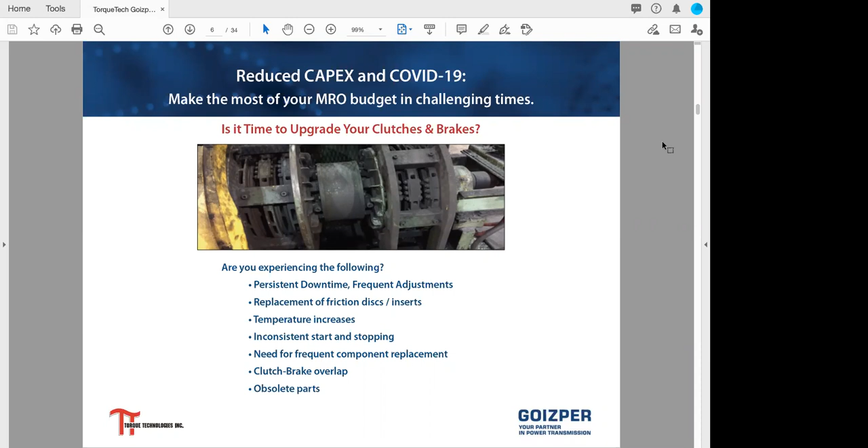Sure, Tom, and if I might add, one of the folks who responded in the survey said that they are having customers who've greatly reduced their CAPEX budgets because of lost business or paused business. But the response regarding MRO is, as one customer indicated, if it has to be fixed, we will fix it. So along those lines, is it time to upgrade your clutches and brakes?

Jeff, that's interesting because we are right in the process right now of reviewing the potential to do a conversion on a 1,250-ton press, and that will be strictly through a maintenance budget because the customer has stopped all CAPEX spending. So yes, and as far as is it time to upgrade your press, I want to just take a look at the picture.

And if you see that clutch and brake, I see nothing but headaches and problems. You have a separate clutch brake, so there's a potential for overlap. You have old components. What are you going to do if you can't buy spare parts? Also you see a lot of inertia, a lot of heat buildup, and you'll experience a lot of the items that we have listed on the slide.

But basically, you can take that clutch, and I am quite sure you can buy a new clutch brake for about the same price, maybe even a reduced price, as it would take to buy a full set of components to put that clutch brake back in service. Thank you.

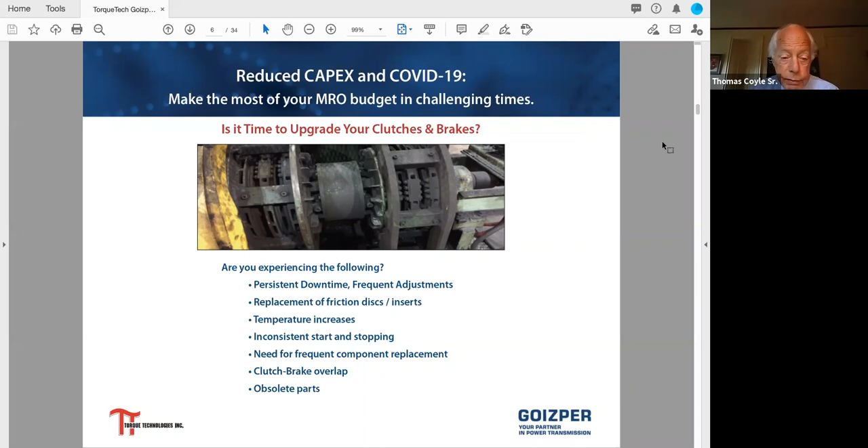Ralph, what do you think about that? Well, I appreciate it, Tom, and my thanks to Torque Technologies for allowing me to participate in the webinar. I want to preface all this by saying that the things I say, especially when it comes to the current status, this is my assessment of what I've seen in the hundreds of plants that I've been in over the last 35 years.

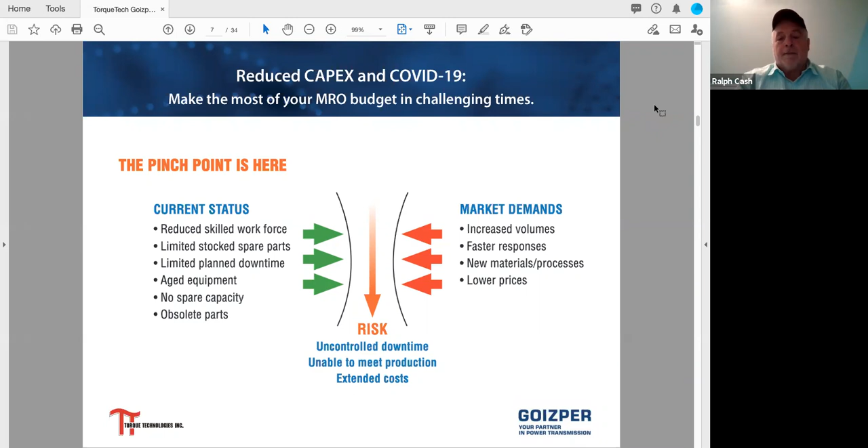Yeah, I just wanted to turn this over to Brad Binks, who has just received a very interesting question regarding automation. Brad, can you jump in on this? Well, yes, of course.

Ralph here has been speaking to the point of skilled trades, and the reduction of skilled labor in the workforce. One of the questions that came through, which is really timely, is what's the impact of automation on all of this? I think we've seen very positive impact on production capacity with automation.

This has certainly helped fill the gap on a lot of skilled trade issues and unskilled labor issues for that matter. But when we're talking about skilled workforce, what we see at Torque Technologies when we visit customers, we still see very good people, very talented people. There's just fewer of them. They're handling not only the stamping presses, but all the automation, whether it be welding automation or the automation around the presses, feeds, whatever they have in their plant.

And when it gets down to some of the nuts and bolts that we deal with working with customers, what we don't see is the depth of knowledge that there used to be years ago, especially in the stamping industry. I think that's partially what Ralph was alluding to.

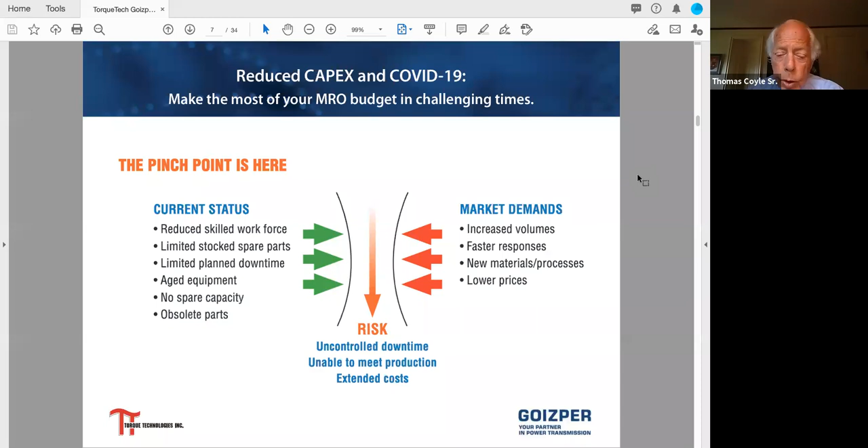Thanks, Brad. It brings up another point which Ralph mentioned, about people in the workplace. In fact, the last couple jobs we've looked at, customers come to us to be the total solution. We're doing not only supplying a clutch brake, we're doing the engineering, the transportation, the manufacturing of bracketing, any machining, and taking charge of the whole project. So we're seeing that again as a reduction of workforce.

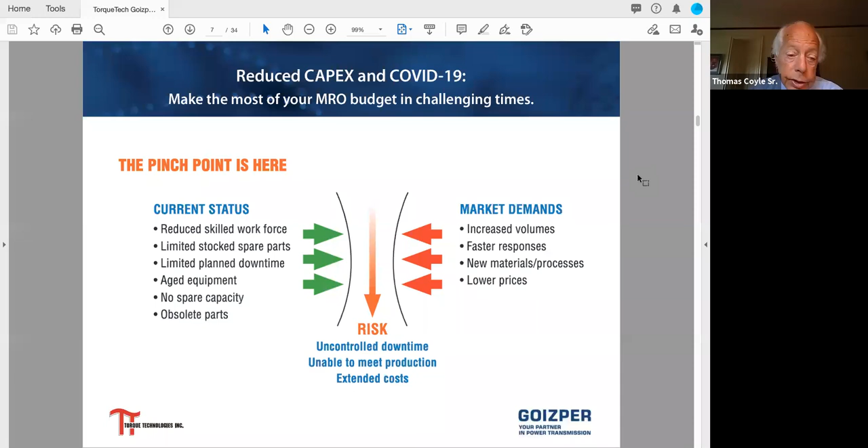And I'd like to go to the next slide if we could, and talk a little bit about and ask Ralph to jump in, because he's done a lot of this. Ralph's had a lot of experience doing press inspections when he worked for press manufacturers and major stamping manufacturers. Obviously, if we can get customers to allow press inspections, from there we can do the preventive maintenance program, set those up to match what we found with the press inspections to keep equipment running. Ralph, again, if you wouldn't mind joining me to just talk a little bit about the advantages of doing a press inspection and PM programs.

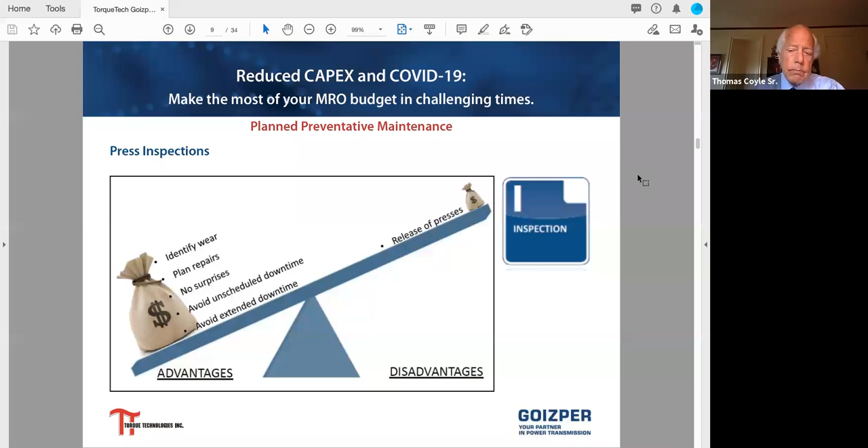Sure, Tom. On the inspections, I think it could be left unsaid, but I'll say it anyway. It's the key to understanding the condition of your equipment, to get an overall view of what shape your machine is in. By taking that information, you can develop an action plan for addressing the issues found during the inspection. But it's not just the inspection as a whole, it's understanding the information that you're gathering.

I think in the past, the thought should be to provide information as if the person reading it has never seen a press before, to make it as user-friendly as possible. Again, going back to my first comment, inspections are the key to understanding the condition of your equipment, because you can't fix what you don't understand, and you can't fix what you don't know.

And in this case, with our machines, ignorance is not bliss. It's not a human body, it's not going to heal itself. A mechanical press or hydraulic or whatever, it's only going to get worse. But you can't fix it if you don't understand it.

And then you got to understand the information that you're looking at, your brake travel. What does that brake travel mean, and how am I running the press? Do I have two months? Do I have one month? When I was with Clearing, we walked away from a press where the lead technician said, I'm going to put money down that that thing is going to fail within the next seven days. And they called the next day.

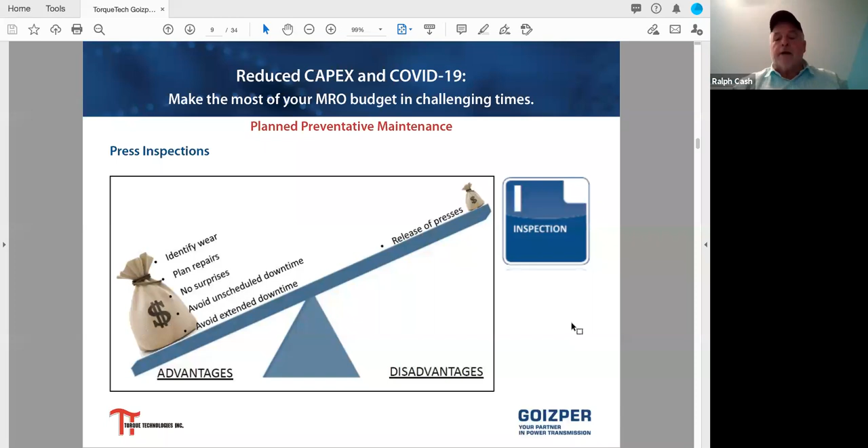Thank you. So, really, the result of all of this we're talking about is going to lean manufacturing, which can be a very successful operating measure with overall equipment effectiveness.

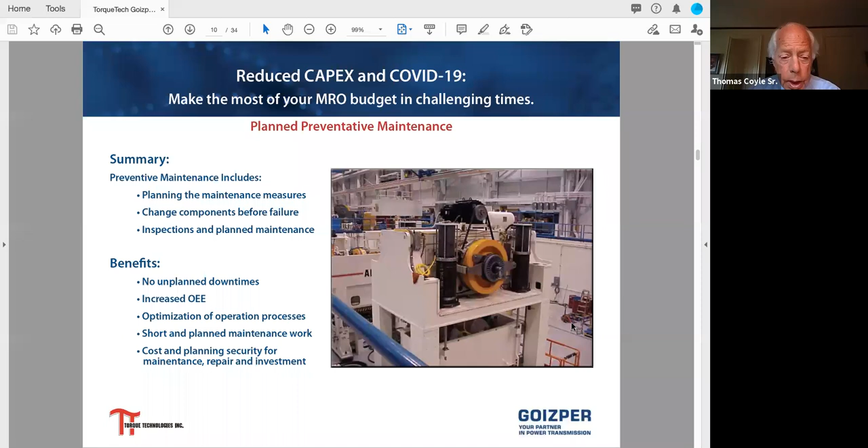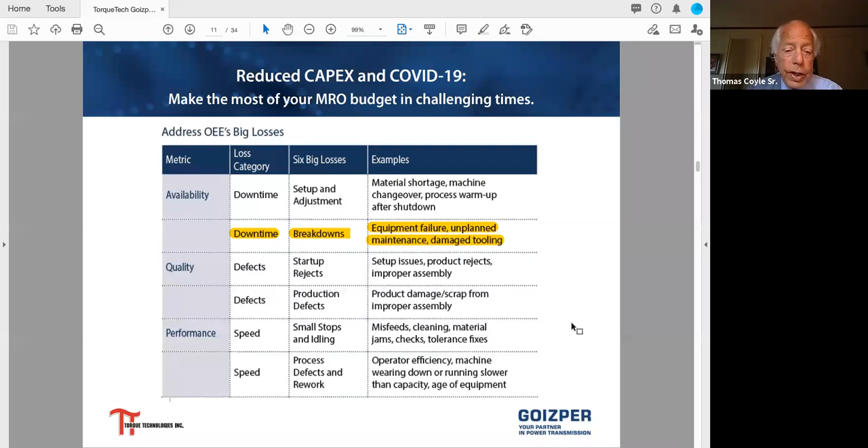The Harbor reports and other international measurements state that 85% is world-class and 60% is normal or typical for OEE. So if you're down at 60%, there's a lot of room for improvement that you can realize by increasing those numbers, doing things like upgrading equipment or doing clutch brake retrofits.

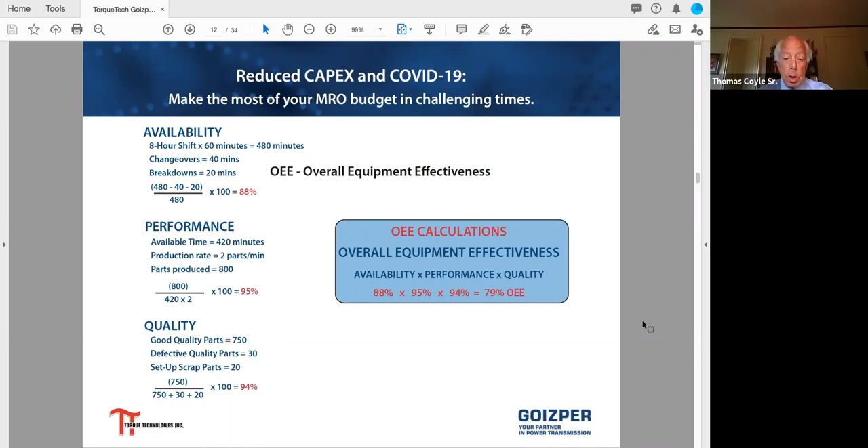Thank you. I'd like to now call on Ralph to get into some specifics of the retrofit process. Well, Tom, as you know, the anatomy of a retrofit begins with compiling the information that Torque Technologies would need to specify the right clutch and brake for the application.

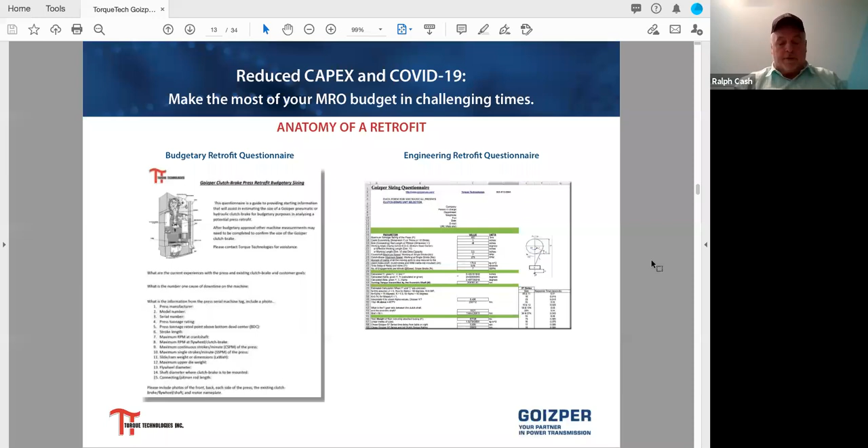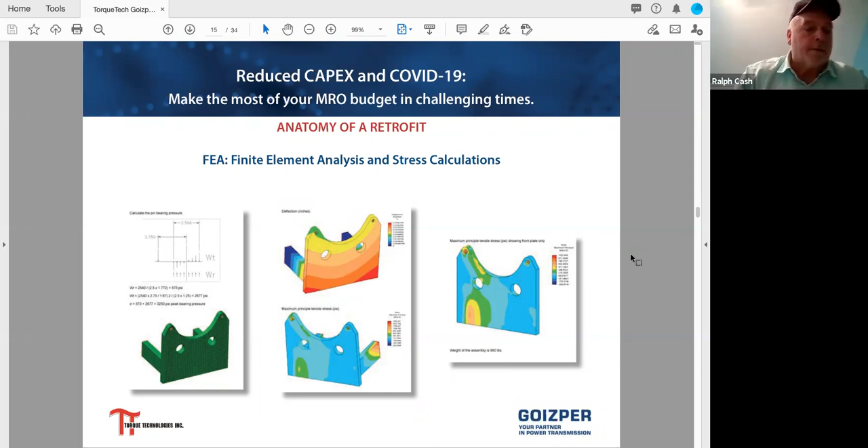It can handle the torque for the new clutch and brake, and it gives Torque Technologies the comfort of knowing they're providing a good product to their customer. Next slide.

While it's coming apart, you can get a tape measure, calipers on it, whatever you need, and then take those final dimensions to verify that what you were specifying is accurate. Remember, it's just a budgetary questionnaire to give you the cost and specification for the clutch and brake being recommended.

This last step is going to verify that what you're getting is actually the correct clutch and brake, and if you need any other parts like modifications to the brake bracket or whatnot. Then the last step is aftermarket support.

Something Torque Technology also provides is a quote for all perishable items. If you're able to get that quote from Torque Technologies on the perishable items for your clutch and brake, even if you're not able to order those right away, you can't inventory them, but keep that information close at your fingertips so you can order them when you need them.

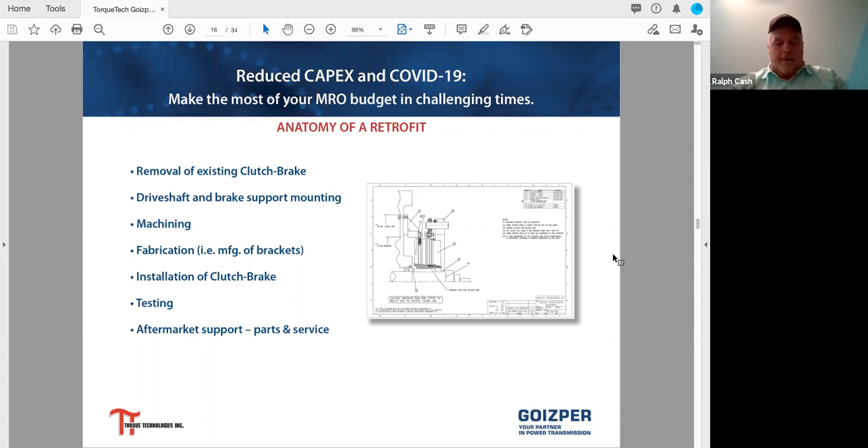Ralph, appreciate if we could go through some of the case studies, because you mentioned you've done multiple clutch and brake retrofits, and we're grateful that a lot of those have been with Goizper clutch brakes. If you could briefly go through some of the conversions as examples, would appreciate it.

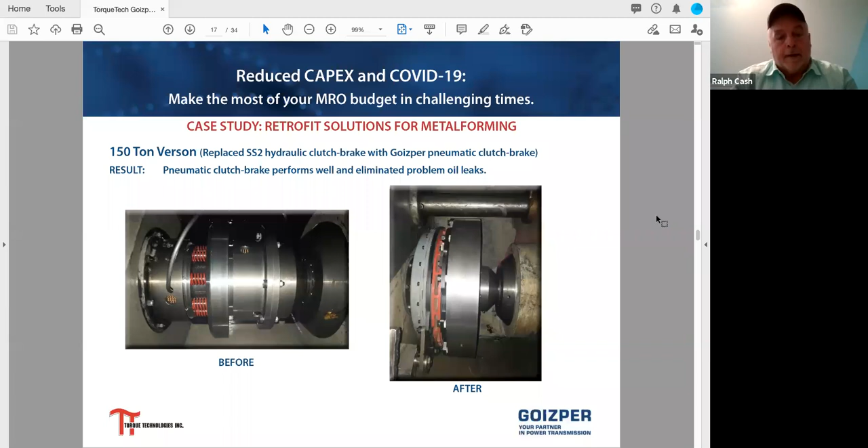Sure, Tom. The first case study is a 150-ton Verson. It had the original hydraulic clutch brake on it. The customer called company A and said, I'm losing oil by the barrels daily, and they're taking that oil and putting it back into the reservoir. He also said we don't really know what the company we bought this press from was doing as far as their application and stamping. So the question is, do I need a hydraulic unit? And if I don't, can I retrofit it with a pneumatic clutch and brake?

Company A went in and took all the necessary information - the hardness of the material, the upper die weight, the speed, the flywheel speed, the shaft speed, all the press specs - and put it into the engineering department. The answer to his first question was no, you're not generating the kind of heat that whatever the customer needed this for prior to purchasing the press, you don't need a hydraulic clutch and brake for what you're doing. So the answer to the second question is yes, you can retrofit this with a pneumatic clutch brake.

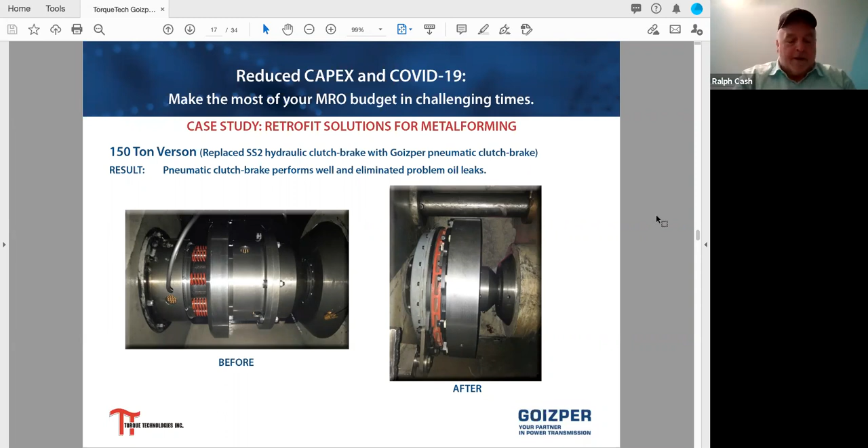At that time, as I said on one of the previous slides, this was when they took whatever measurements they needed that they couldn't get when the press was running before, especially on a hydraulic unit when that whole assembly was enclosed. So they were able to finalize all the additional dimensions.

The issues they found were the shaft was broken, so a new shaft was supplied. A new clutch support ring was manufactured and made. New spacers were made, the new brake pin supports were manufactured and installed. Then some of the pneumatic lines and lubrication lines called for some rearranging.

Let me say this, and I know I've probably said a lot so far, but from here on out, if you don't remember anything I've said, remember this: a retrofit does not have to be complex. Now on the surface, this looks like a very complex clutch and brake retrofit, but it doesn't have to be complex if you're working with the right people and you're working as a team.

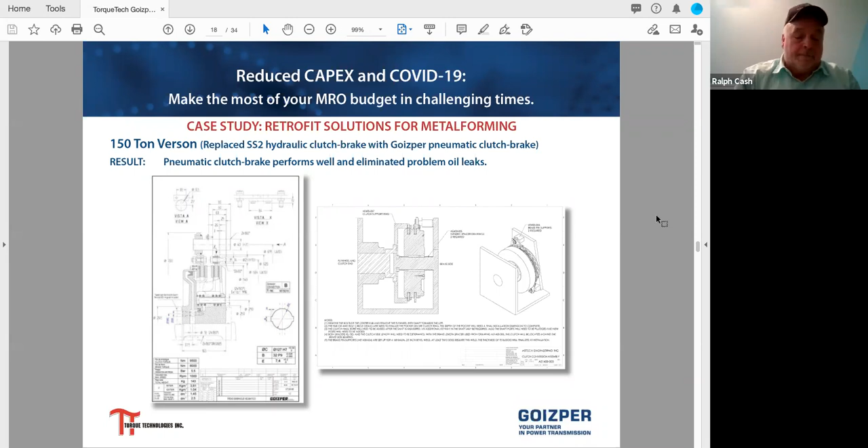Next slide, yes, we'll go into the next study. This was an automotive supplier that had a 400-ton clearing press, and they had the old Tornadyne pneumatic clutch brake on it. I think Tim Burns is on the panel - he would remember the Tornadyne clutch and brake. He's probably chuckling right now.

Company A went in, and it was intended to be just a regular clutch brake rebuild. But they ran into some problems where some of the parts were obsolete, including the replacement flywheel bearing, which would not hold the shaft straight, and it was allowing the flywheel to drag.

So modifications had to be made to the flywheel and other parts, the bearing had to be replaced, and you can see a partial drawing of the new drive assembly there. But the other issue this company ran into was the air supply on the shaft would not line up with the new hub for the new Goizper clutch and brake.

So at that point, there were only really two options. One, make a new drive shaft, and on this particular press, it would have been a very costly drive shaft to replace, or come up with an alternative solution. You know what the old saying is, there are no problems, only solutions.

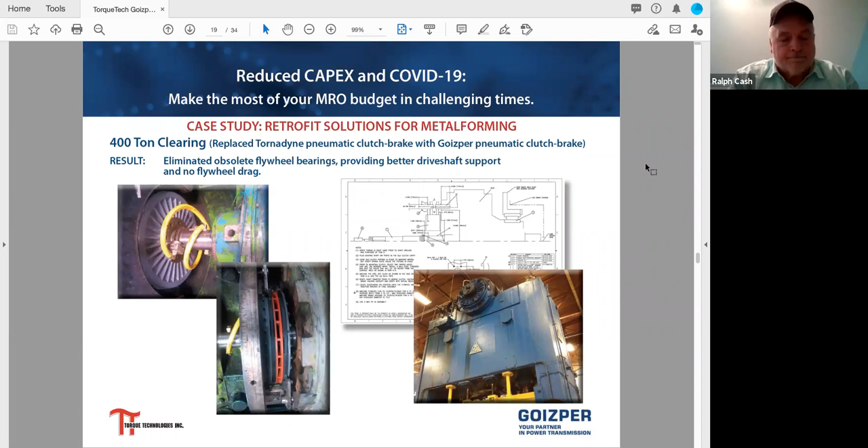So the next case study is on a 1,200-ton Verson, and Dan Spencer from Torque Technologies is going to take over from here, and he's going to go into that Verson retrofit. So Dan. Good afternoon, everyone.

Dan Spencer, Torque Technologies. One that we're currently working on, this one is in process. Like Ralph said, this is a 1,200-ton Verson press. It's a very large unit. But the customer had the original clutch brake on there.

They were running it for a while, and then one of the housings cracked. They had it repaired, and then it cracked again. So they reached out to the OEM, of course, and replacing it was going to take months just for the clutch brake itself, then the installation. So in addition, the overarching cost was very high. So they reached out to us for an off-the-shelf retrofit.

We met with the customer for a site visit to discuss the goals and the scope with the customer, and we were also looking forward to seeing the press, to see a running press. But we were unpleasantly surprised at the site visit to discover it had been removed for quite some time, leaving us to do only a static inspection of some of the parts.

I imagine that was quite a surprise to you, Dan. I know how you like to see things run. Yeah, so doing an evaluation makes it a little hard without the clutch brake on the press. It does. So as a whole, this is certainly not ideal.

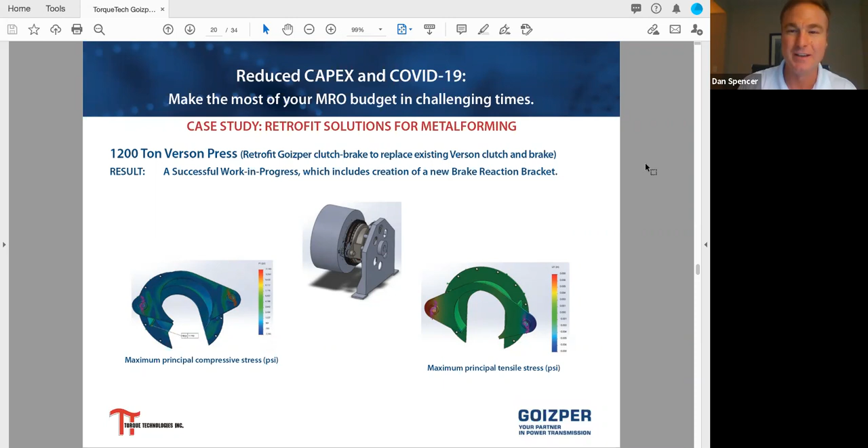But we always give an honest assessment of the press and the clutch brake and the process, not to mislead the requirements of this press. And the recommendations can include ensuring the press and components are a good candidate for a retrofit. So we can't install or recommend a new clutch brake if it's not going to solve, or it may exacerbate or amplify, an underlying issue.

But we walked through this process with the customer, discussed the scope, and that we at Torque Technologies would own the entire process. So this is where that team building comes from that Torque Technologies offers—us gathering the engineering support, us gathering the rigging support. So from the current site visit, engineering analysis, the design, the drawings, to the complete coordination with the press repair company, as well as machining, rigging, and installation, is something we build with that team to make sure it's a complete retrofit and a complete solution for the customer.

This particular retrofit requires little modification to the existing shaft and plant equipment, and only requires manufacturing the brake reaction bracket, shown just to the right of the clutch brake in that picture. All of this went from a months-long lead time down to a little over a month: about 6 weeks for manufacturing the clutch brake and the brake reaction bracket.

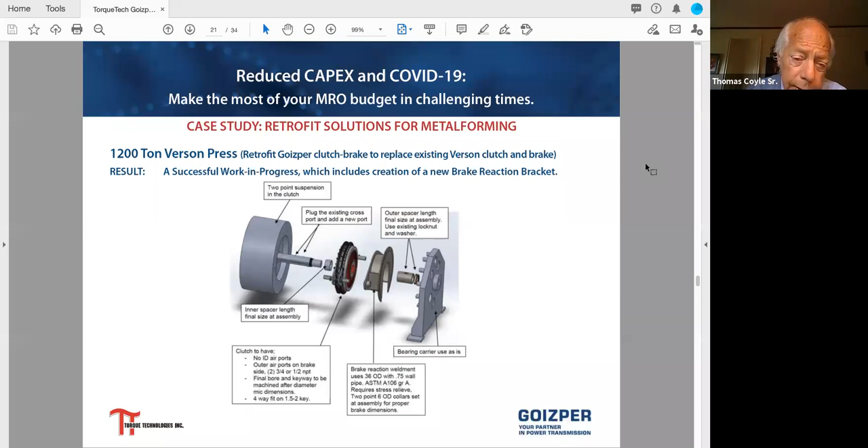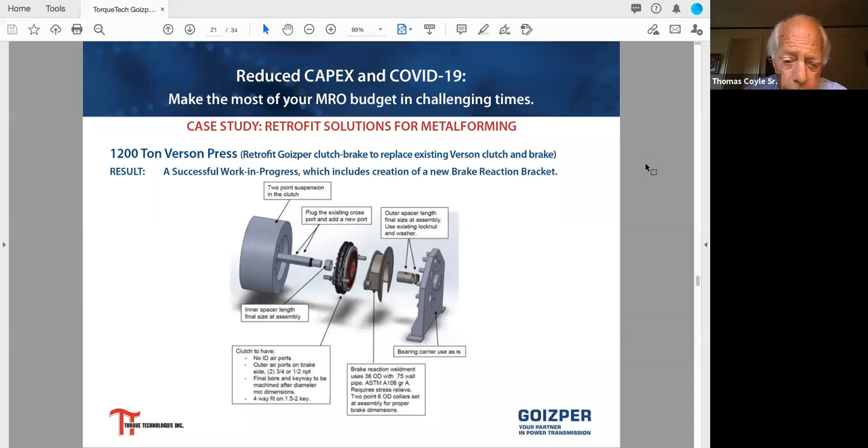One of the key points you brought up was that we're taking a complete scope of supply of the whole retrofit process, from clutch brake to machining to adaptation of the new bracketing, finite element analysis on the bracketing, et cetera. So congratulations on doing a great job.

Just to give our audience and customers a feel for who Goizper is and where we are, many of our customers are world-class customers. Looking at the press manufacturers, I'm sure everyone joining us today will recognize the press manufacturers we're working actively with, supplying both hydraulic and pneumatic clutches.

To give further examples and reference points, you can see we're also supplying all the major automotive manufacturers, and also most of their tiers.

It's funny, we go into a lot of plants and we're kind of like the Maytag repairman. They go, 'geez, I didn't know you had a Goizper clutch in here.' Turns out they do have them, and they just didn't realize it because they've had such success running them without any problems. It's a great point of reference that these people have reached out looking for best practice solutions.

I'd like to turn this back over to Dan, if you could just give a quick overview of the complete product line of Goizper clutches and brakes.

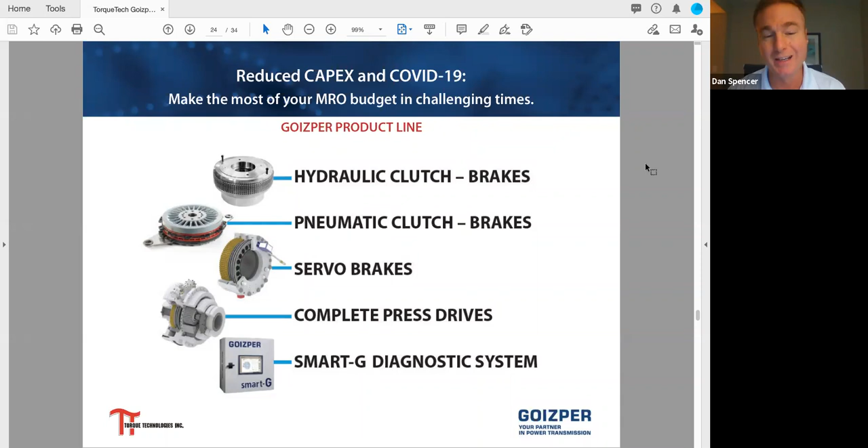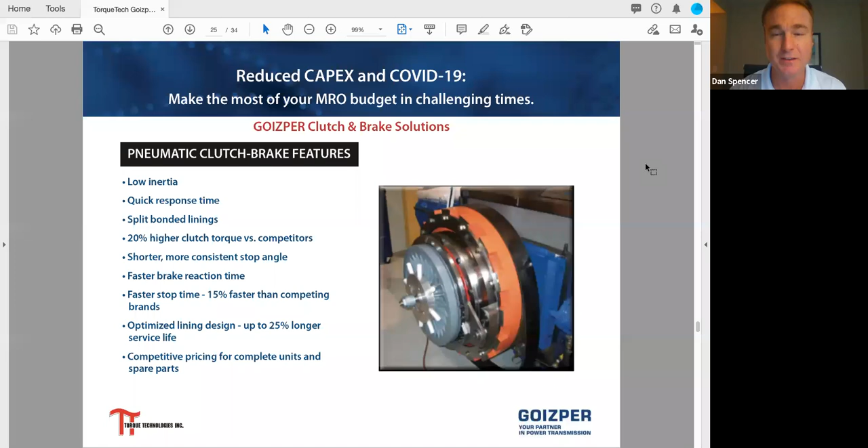So, Goizper pneumatic clutch brakes: a few benefits that distinguish us from our competitors are the split bonded linings, which make lining changes very fast, decreasing downtime. Our lining design and compounds usually last about 25% longer than our competitors, and our stop time is 15% faster. This certainly reduces faulty manufacturing and raw material waste, not to mention the safety factor.

Next slide. Hey Dan, one question I had regarding the pneumatic clutches: I understand that a lot of our clutch brakes, if not all, are interchangeable with competitive clutch brakes.

That's correct. Most of ours are designed to drop into place of several other competitors, such as Ortlinghaus or Desch, making it an easy retrofit. That's something we supply in Sarasota, Florida, supplying the complete clutch brake at a minimum bore. It takes 6 weeks off manufacturing for most of our competitors, down to 1 week; by the time it gets to the machine shop, it's cut and in your hands within 10 days. So that's something we offer at Torque Technologies as well as Goizper, a drop-in solution into the existing pins, into the existing bracketry you already have.

Hey Tom, if I can interject something there, I concur with Dan's answer. I saw a retrofit going back 6-7 years ago where it had an Ortlinghaus clutch brake on it, and the Goizper was actually a direct replacement. Matter of fact, the pins were okay that were in the flywheel; it's a 2-point clutch plate mounting. Pins fit perfectly, we left the pins in the flywheel and just put the new clutch brake on, and gave the new pins to the customer for inventory.

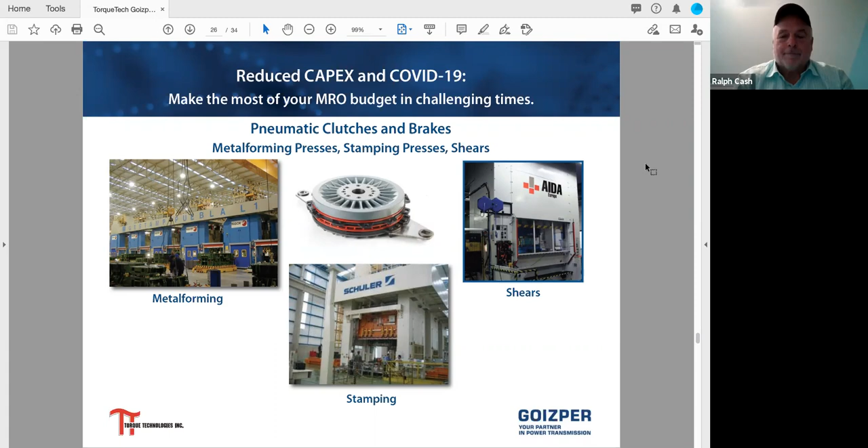Moving on with some of the applications we have here with our pneumatic clutch brakes: can bodymakers, compacting, forging, and as you saw on the previous slide, stamping, and several other processes where we have pneumatic Goizper clutch brakes.

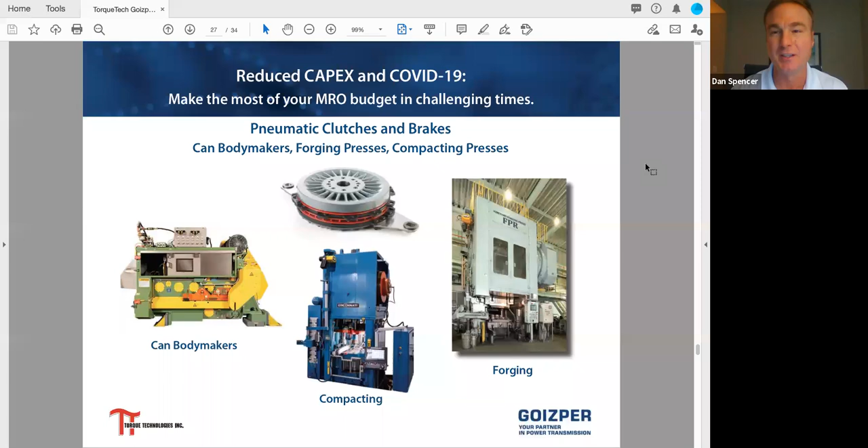And then even moving into the hydraulic clutch brakes, which are low inertia, high torque, high speed, high performance machines that require maybe a single stroke instead of leaving the machine running. It increases the periods between maintenance, so it's a machine you can leave alone for a very long time, and like I said, high performance.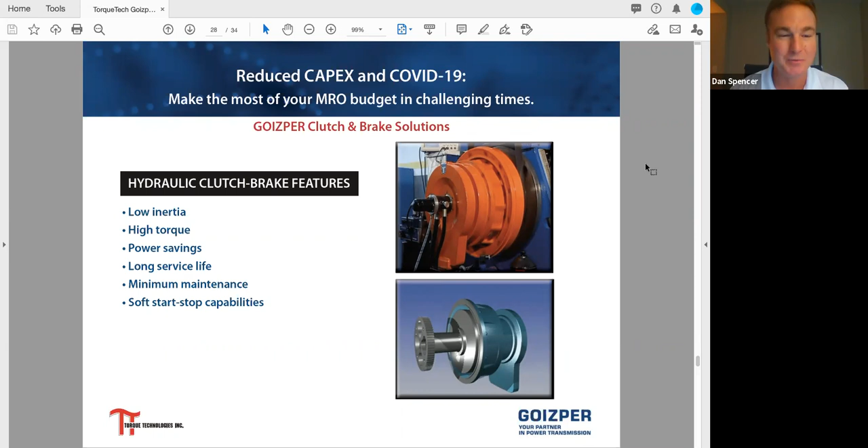So moving on to the next slide, we can see some of the applications with metal forming, stamping, and very large shears, as well as in the can industry. We see that in can body makers, as well as forging presses.

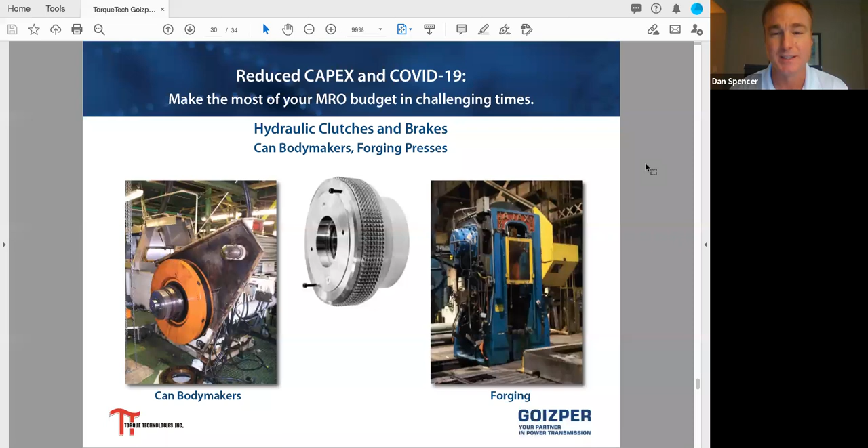Moving on with servo brakes, they're getting growing acceptance from press OEMs and leading manufacturers as Goizper moves into the technology of servo motors. It's very accurate, very high speed. Our design performs better than our competitors, and we're on quite a few OEMs and their servo presses as we move into new technologies.

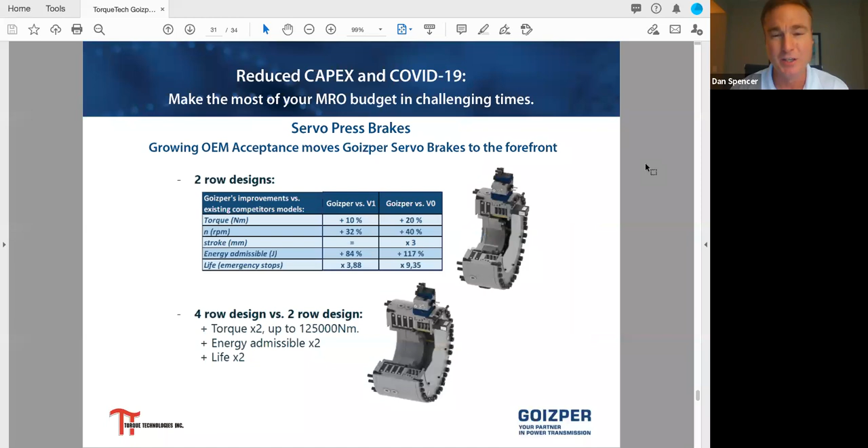Ready to retrofit presses with that size 81 going all the way up to a nearly 1,000 ton range. So we have a team available for you, as well as we build teams with you and our customers to provide a complete clutch brake solution for your manufacturing needs.